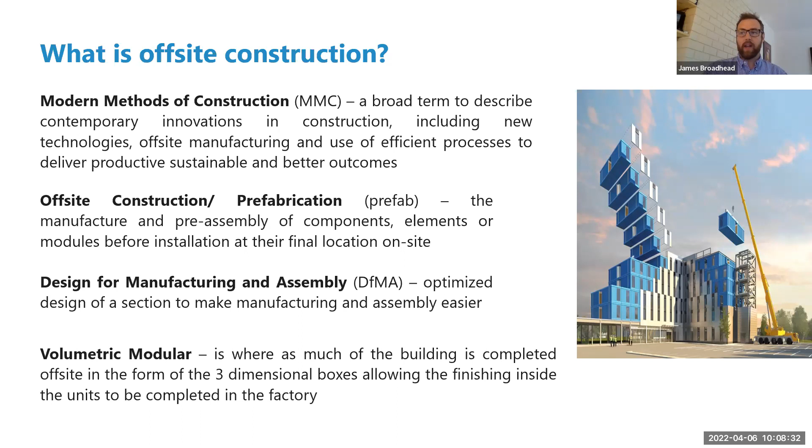You can also see that in component form. And so actually a lot of buildings are built with some form of offsite construction, whether they've assembled some of the electrical distribution panels offsite, whether they've assembled a component, like for example, a bathroom pod, and then brought that to site and assembled it on the full tower all the way up. These are just examples that people aren't necessarily aware of, but it can be possible.

And sea cans, love them or hate them, really good for delivering products on boats. There has been a bit of a trend or some appetite, should I say, to look at sea cans as an effective way to deliver fast modular buildings. Different people have different opinions on them. I think shipping containers are really good for shipping. I think there are other opportunities or alternatives to get your project goals met with different methods that aren't necessarily repurposing. And I think we're probably in a bit of a shortage anyway of sea cans and shipping containers today. So the cost efficiency probably isn't quite there.

It can take both temporary and permanent forms. And so when you see like workforce housing, which I think is what most people would probably relate a modular building to, that's a temporary form. And so it's built to a temporary code, temporary building materials. It's not built to last for 60 years.

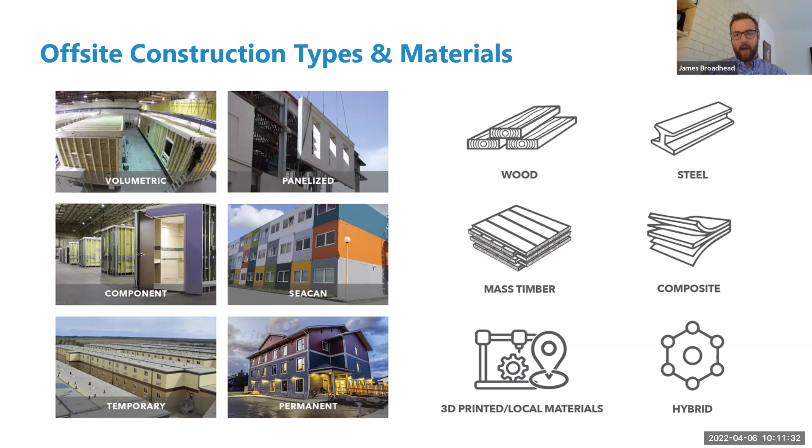Steel, I'd suggest, is more akin to if you've got a concrete building: if it was built off site, what type of material would you use? If concrete's the answer, then steel and modular is typically the solution, because you would typically be over a certain amount of stories. You don't have to be. It's more cost effective to go tall with something like steel, whereas wood and modular is what we normally see in volumetric, because we're competing typically with wood framing, so it's a like for like cost material.

The history of offsite, it's not new. Even though we talk about modern methods, it's not that modern. The new technology coming into the market is, for sure. But I've got two examples here of early modular, if you will. Sears was one of the early adopters, believe it or not. They were essentially flat packing all the components required to build a house into a rail car and transporting it across the country back in 1908. And that really increased in popularity.

They then started doing things like mortgages, and then the stock market crashed and they had to foreclose on a lot of their customers. It wasn't particularly good luck. So they closed that part of the business and rebranded to what we've seen more recently, and then they closed that again. The resurgence was after troops returned, as an affordable and fast way to build housing.

In 1855, Florence Nightingale actually requested, interestingly via the Times, a hospital to be built. They assembled it with 16 units in Gloucester Docks, where it was actually built. They brought over the French soldiers, trained them in how to do the assembly, and then shipped it over to where it was going to be assembled. So the point being, it's not new, but the adoption rate is probably a better question as to why it's not as widely used in the market today.

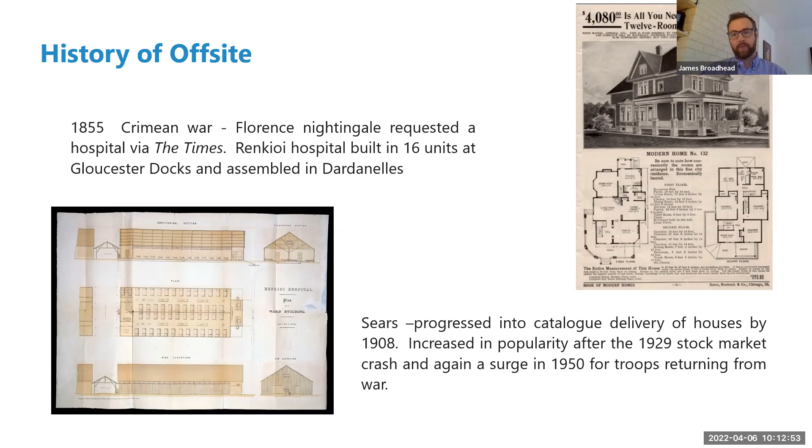Some of the advantages of modular: there are different studies around the world that talk about different advantages. Once we boil it down, the majority would agree that it's faster, it's higher quality, and it's more environmentally friendly. The rest depend on location, on knowledge, and on who you're using.

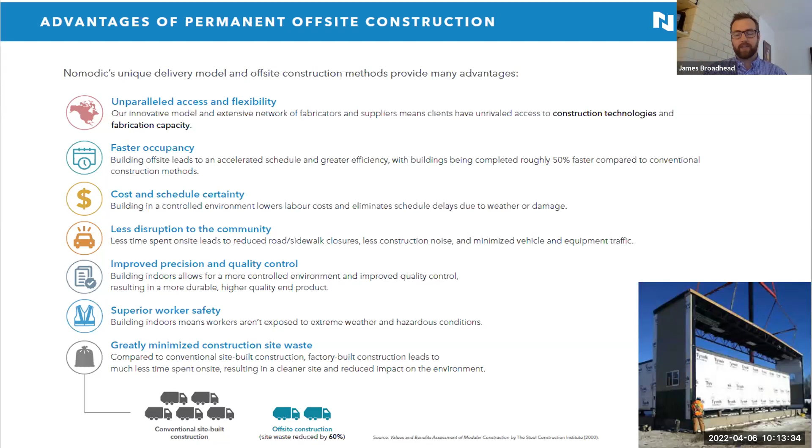I'll talk in a moment about why it's faster, but the quality piece is you're building in a controlled environment. You're not shipping a lot of materials up to northern Canada, leaving them exposed to the conditions and having to overship 10% of the building materials, which you're going to lose to weather damage. When you build in a controlled environment, you're really controlling that weather impact on the building and how it then performs.

The environmental benefit is you're building with a product that you're ordering, and those materials you're using you can also sustainably control. In conventional construction practice, you're over-speccing all the materials in terms of quantities due to wastage, offcuts, and damage, whereas what we typically try to do in a modular or prefabricated fashion is build to the optimal size.

We don't really want to cut ends off wood, because there's not much cost saving by cutting it off; you're still paying for the material anyway. So build the building a little bit bigger if you can. Those are some of the things we'll look at from a design versus cost perspective. That's where you'll see a lot of those benefits, because material is ordered to size, and also the materials they're using.

From a construction perspective, on a conventional construction site you'd have multiple vehicles showing up to drop off and deliver, and the more remote it is, the bigger the transportation piece. Whereas in a factory setting, no matter what type of technology you're building with, they're usually using their local supply, making shorter deliveries to that factory. All the assembly is happening there, and then it's one transportation per box.

So the idea is that you have less transportation, which is then also more environmentally friendly. And then the other part of it is to do with landfill as well. And so less goes into landfill through manufactured assembly, because it's all about efficiency versus wastage. Not that conventional construction is wrong in any way, shape, or form.

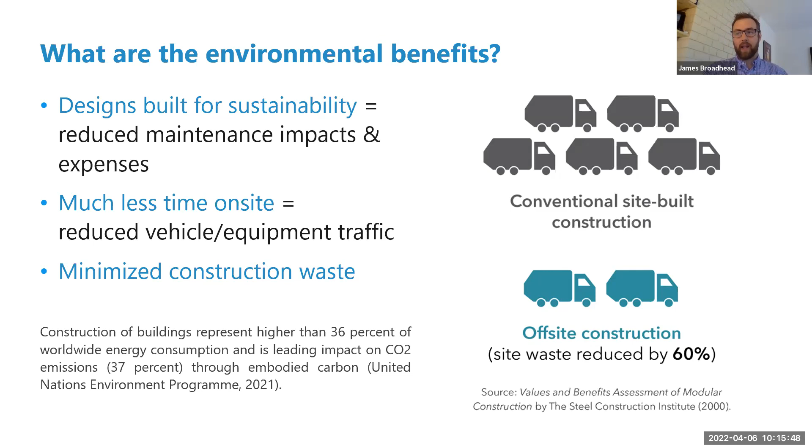So why is it faster? So when we build in a factory, no matter what it is, that's happening at the same time as the site's getting developed. So in a site built, you would go through the same design, the same permitting approval process, and then you would start your site development. And once the site development was complete, then you would start building upwards with your building. What basically is happening is that while the site's getting built, the building that's going on top is built in a factory at the same time, and then they're delivered and they come together on site.

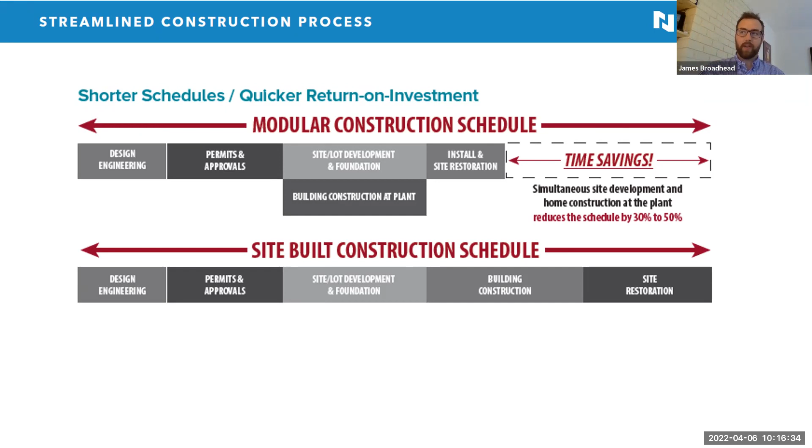And so that time saving, if you were looking at, say, a 40,000 square foot building, for example, that might take 2 years through a conventional construction process, whereas we could do that in 10 to 12 months through a modular process. But it's not all roses. There are challenges. And so some of those challenges, you'll notice that cost is a benefit and it's there as a challenge. And the reason for that is that it depends. It depends on where you're building. It depends on why you're building it. It depends on the materials that you're selecting.

And I think one of the biggest challenges that we face in the industry is really knowledge. And that really comes down to the wrong building type or the wrong type of offsite construction selected, where components would make better sense. In some cases, they'll use a volumetric delivery, which might not be the right solution. And so as a result, some of those cost efficiencies are not gained, but that's typically down to knowledge for the most part. And then the other reason for that is labor.

So if you look at the Alberta market right now, I'd suggest that in most places it's cheaper to build on site, albeit it's slower. And so there's that, I guess, conflict, if you will. Whereas if you're looking at, say, the remote communities off the coast of BC, we found cases where we're about 20 to 30% cheaper through offsite construction compared to conventional construction.

And then also cost, it depends on the process you go through. So if an offsite specialist is involved in some way, shape, or form to help design that building for fabrication, then you can get a more efficient design for fabrication. When the design is inefficient, that drives cost, because more variability within the construction or the manufacturing process, that lack of productivity, same with on-site construction, has a labor cost component to it, and that increases it. So cost is a challenge. It's also a benefit, but again, it depends on the situation that you're working within.

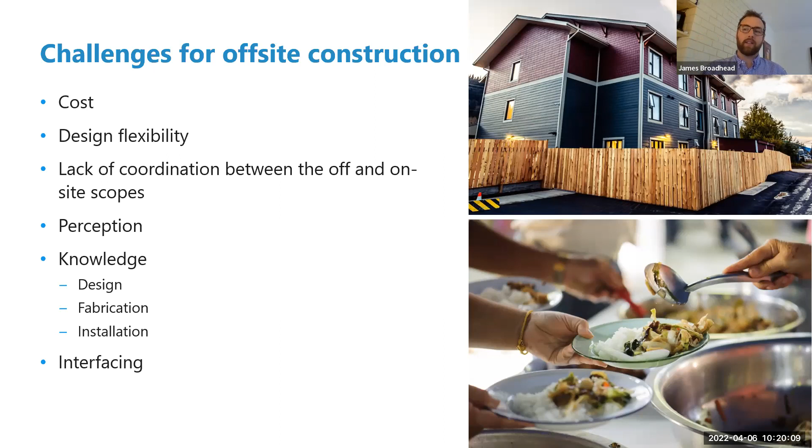So I've got a video here which looks a little bit at the process, but this is more to the assembly process. So this is a project that was built in Tofino. It's a hotel which is on the coast. It's a very challenging site to be able to build in. Lots of constraints when it comes down to labour and labour shortages. So that's why offsite was selected.

But I'm just going to play a quick video in terms of showing you how the building comes together once it leaves the factory. So you can see here, this is the truck bringing it down the road. You can see there that it's rigged, ready for craning. And then this is the interior shots of the actual building itself.

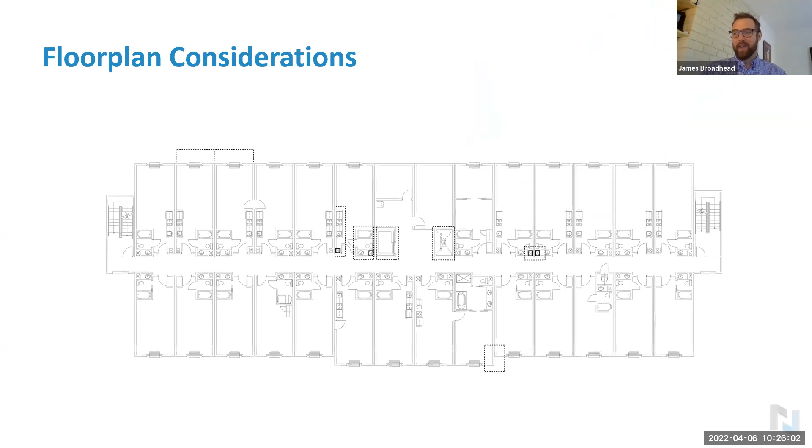Floor plan considerations. So these are just some of the things, from a senior living perspective, to be aware of. This is all about design for manufacturing and assembly. The more consistent the module widths, the better. We do have to have chases that run floor to floor through the building because all those boxes are built independently, so that needs to be considered. We typically try and push these through to the corridor because it makes the most sense. And the biggest one is aligning of walls through the mate lines because that makes it more efficient for site assembly.

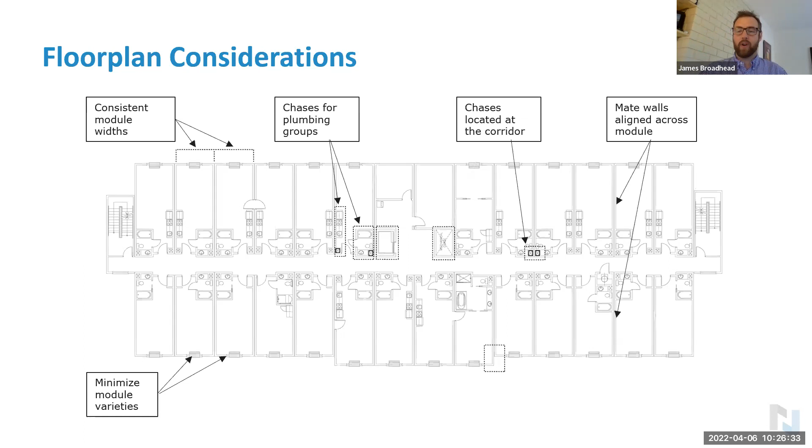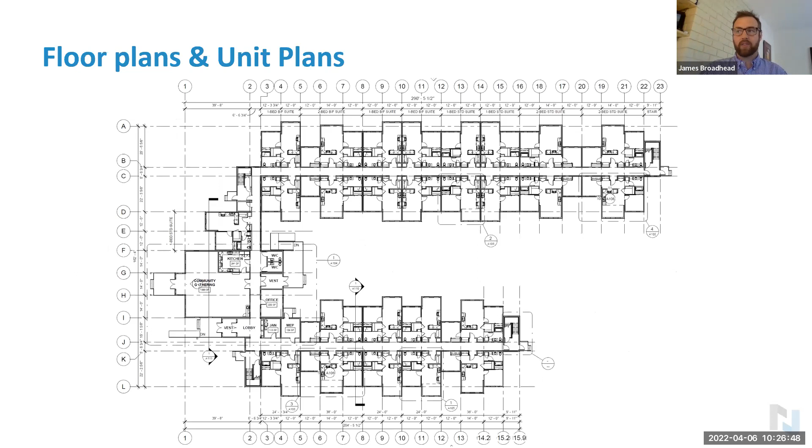This is one of the buildings that we worked on, which conforms to most of those, but not all of those. But based on the amount of boxes that went into this building, we could still do runs of between 20 to 30 boxes of each of the individual box types. But the floor types look more like this. So one-bedroom units that we're more used to seeing in a condominium, whereby you've got nothing crossing the mate line. All the plumbing is off to one side or off to this side, but it's not crossing this mate line. And it's consistent module widths that make the difference for this to be an effective design.

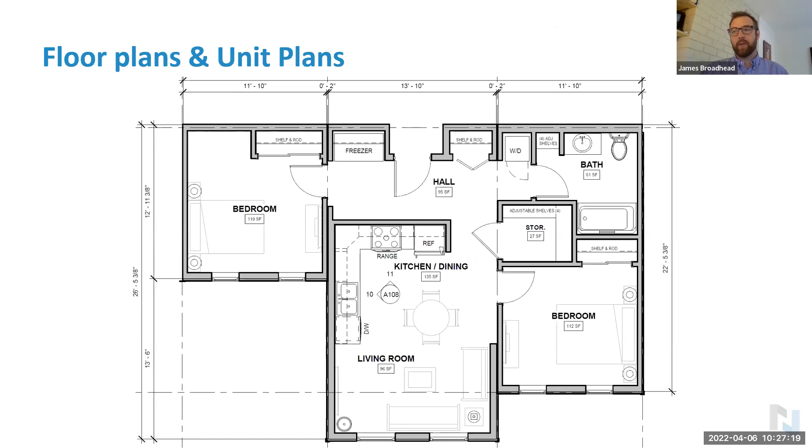And then for this one, this is actually a 2-bed unit within the same place. This box is not efficient when it comes to cost, but it was really important to the owner that they had a 2-bedroom design. And so that's how we made this one work.

Why we care about the design, it really comes down to transport. So it comes down to how we're going to ship. Everyone talks about helicopters because they think that it's quite cool. I've never actually done a helicopter lift. I'd love to do one, but invariably, I think that if we're talking about helicopter lifts, then we're probably going to be mismatched with the project goals in the first place.

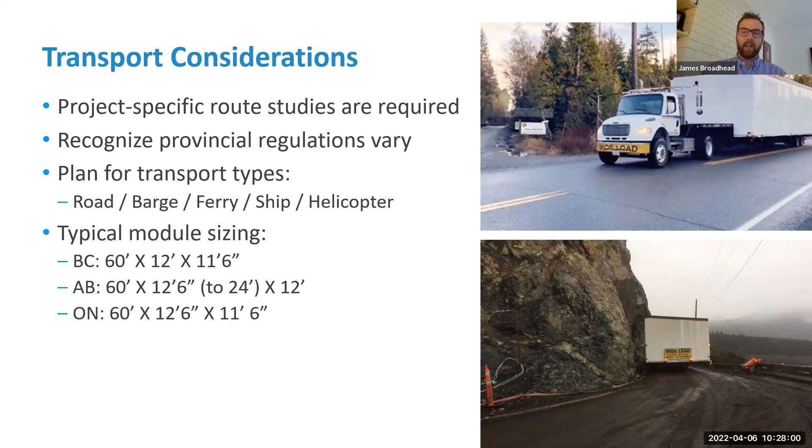We typically need to look at road, barging, ferrying, shipping as the transportation types. Limits for us are going to be around the bridge sizes, the width of the road. In Alberta, you can move 24-foot wide buildings. You can't do that in BC. And so these are transportation considerations that go into the design process that we just need to be aware of so that we can design to make sure the outcome is met.

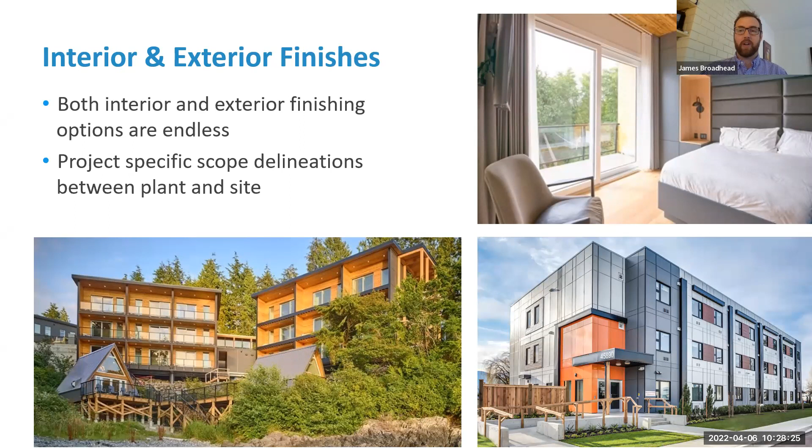Interior fit and finish. So both interior and exterior options are essentially endless. You can do whatever you want within reason. You can do drywall, no problem. In Duffin Cove, we did wood accents. Again, no problem. You can use vinyl covered gyprock if you prefer. It really comes down to whatever you want to do. But modular or offsite construction is not the limiting factor in this case. It just really comes down to design.

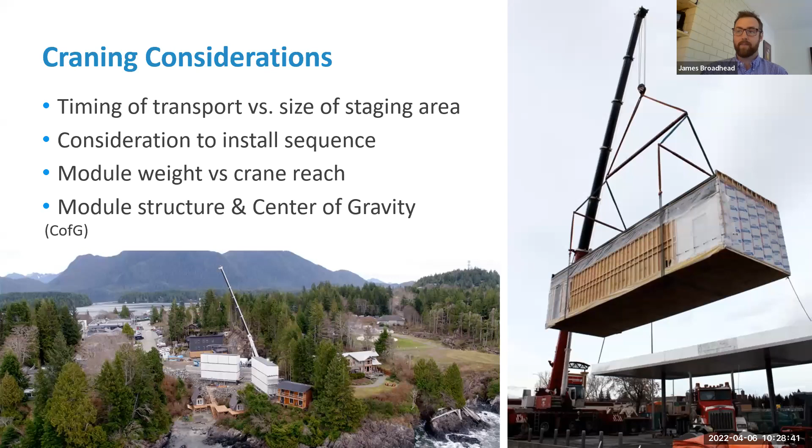And then again, crane considerations. We've got to make sure that we can actually lift the building if we're going with volumetric. Again, with panelized, you've got to be careful of the weight because those composite materials are typically very heavy. So the solution really is to ensure that the project is feasible.

So make sure that you're mapping the project goals effectively in the first place. And based upon that, the right technology will come through. And you can align the right delivery, whether it's on-site, off-site, panelized, or volumetric. The options are endless, but it really starts with understanding what the project goals are in the first place and being true to that. Matching the delivery with the project goals and making sure procurement methodology lines up as well.

So an example would be a design-bid-build process would not be the best suited to offsite construction. CM or design-build would be, because you can move things earlier in the process, like ordering of long lead items through that delivery methodology, whereas you can't in a design-bid-build. You have to go all the way to permitting, and then you lose all the benefit of the schedule that we're trying to get.

Understand the limitations. So that's what I'm talking about, the floor-to-floor assemblies, making sure that you're aligning with. You can do all your amenities on the ground floor and make them as big and open and wide as you want. And to do that, we're going to build with conventional construction with a concrete podium, or we'll look at things like CLT options.

Or you need to be aware of, say, the shipping limitations. So if we're working in remote locations, we start looking at things like what's the size of the barge? If we're using BC Ferries, what's the width and the height of the modules sat on the truck that's going to make sense to get to the project site as cost effectively as possible.

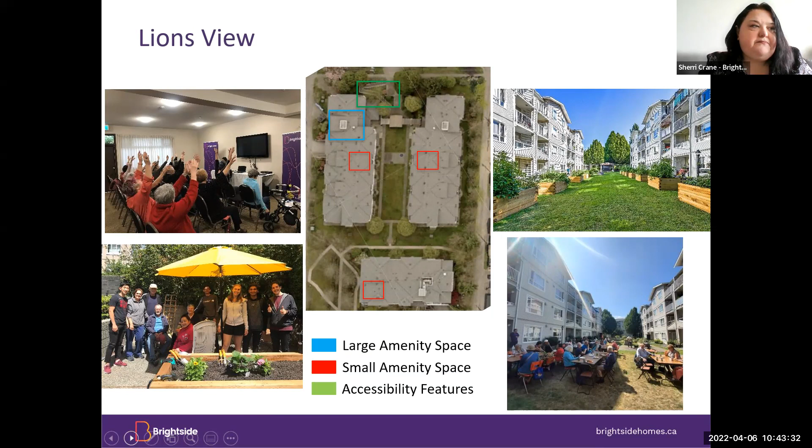Often new, affordable, and social housing developments are met with a not in my backyard attitude from those living in the proposed development area. The stigma and opposition can add extra layers of stress and resulting isolation for the residents moving into the housing complex.

For example, a modular housing development in the Renfrew-Collingwood area of Vancouver was met with much community backlash and media scrutiny. Community-based senior service agencies tried to make a concerted effort to engage with the senior residents in an attempt to welcome them to the community, but none of the seniors were comfortable or trusting to engage given the community NIMBYism.

Complaints of lowered property values and being portrayed as drug addicts and mentally ill and criminals and a danger to the people in community was in turn met with the residents feeling unsafe and unwanted. A well-managed development with attention paid to its maintenance, outdoor spaces, and residents are what will make a development successful in a neighborhood.

When homes are affordable and appropriately accessible in layout and proximity to services, the more likely a senior can age and live a healthy and independent life. Municipalities of all sizes have the opportunity to address seniors' homelessness by enabling the implementation of modular housing in their communities. Modular housing offers the same benefits of traditional construction, and it's the shell that is the modular part.